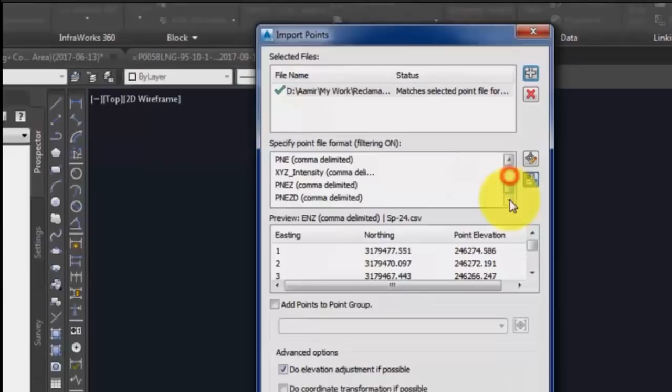First I'll go to the Insert tab and click on Point, then choose the location of the point. This is a CSV file, and I will put the pattern the same. After that I'll press OK and receive the points here.

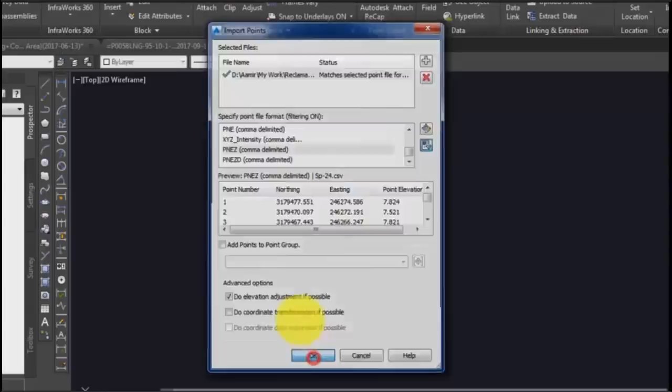As you can see here, I have all the points I imported from the CSV comma delimited file. I'll click on any one point, right click, and go to the point group properties.

Now you can find so many options like description only, elevation description, elevation only, point name, and the last one, point elevation and description. We can add more point labels, even point styles.

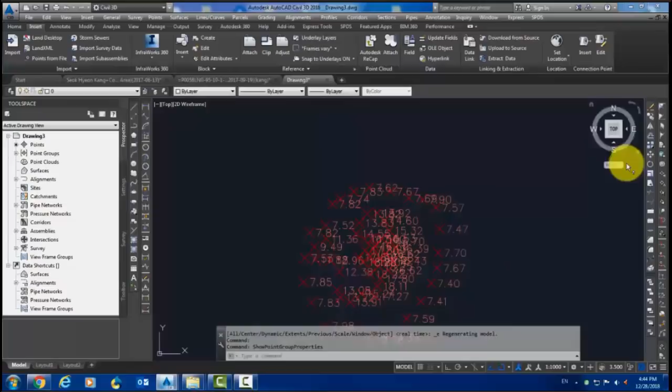He said when he opened the drawing he cannot find these options. The reason behind it is, in this AutoCAD drawing, I'll import these same points, and you can see here also I cannot find these properties.

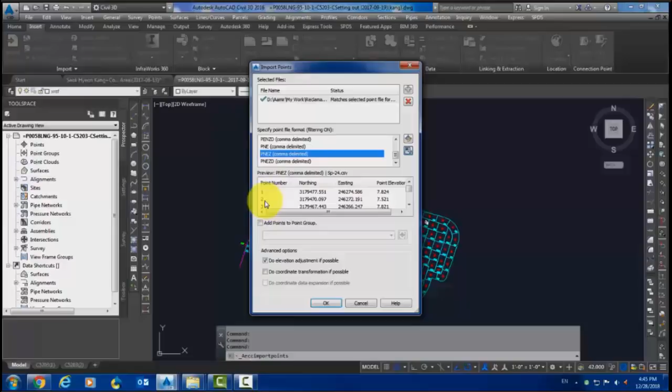I'll proceed with the same procedure. I use the same CSV comma delimited file, open it, use the same PNEZ comma delimited, press OK, and here I have these points. Now you can see these points show up.

I'll click on any one point, right click, and go to the point group property. Now you can see I find only None and Standard. Point style, label style, both are None or Standard.

That is the question he asked me, what is the solution for that. Let's see, we will do this. You can see in the email he said only standard shows to me.

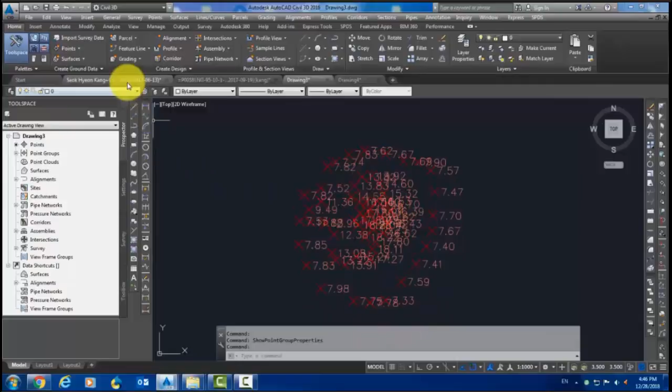So here I have one drawing. In this drawing I set out my own settings for the labels and point styles. I will import the points first, and now you can see I have a different style, which doesn't match drawing number 3.

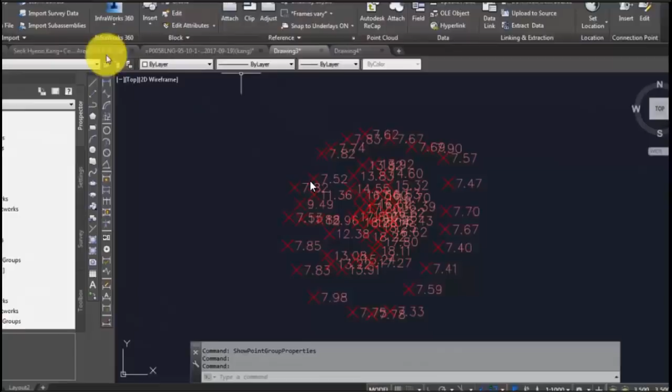It's different, only showing the elevation and the point labels, point style. This is the point style and point labels, which I made myself with my own style.

Here you can see I gave the names basic copy and elevation only copy. I copied them, then edited and saved these patterns. This is the way we can make our own point labels and point styles, which I already explained in my previous video.

So I will continue this video. Let's see.

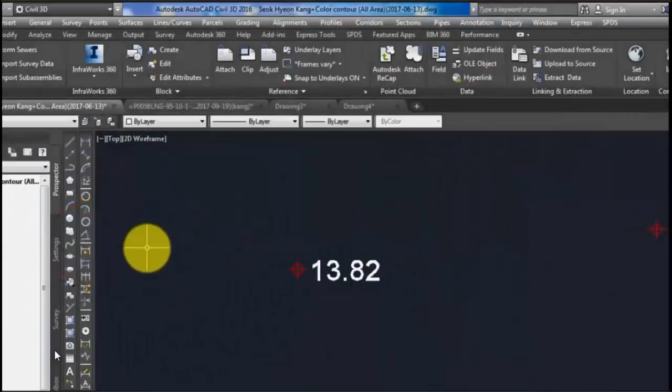I'll close the extra file. Now here I will import the same point style and label style that I made myself. So this one I will import now.

If you need to understand how we can make these styles, please watch my previous videos.

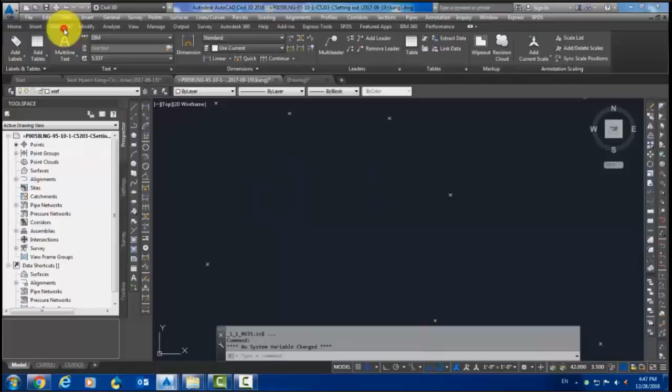So let's see how I can import these points. Go to the view, and then find the tile vertically option. I'll click on that, and now you can see 4 open drawings. One is the home page, this is the drawing number you can see in the middle, this is drawing number 1, and this one is drawing number 3 in AutoCAD. As you can see, all the drawing names are on the bar.

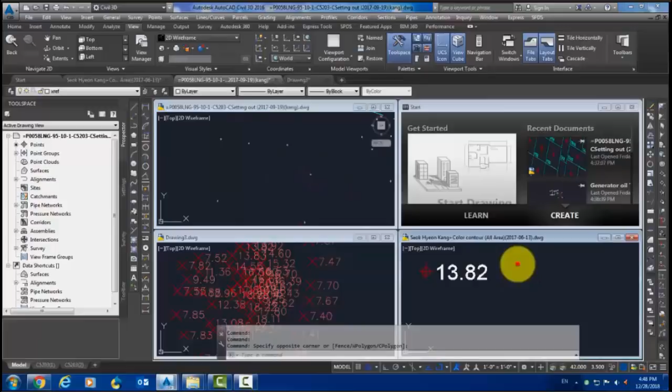So what I will do, simply let's see. For example, I click on any one point, or if I need a copy of these points, I have to work with the same drawing. So I click on this drawing and then go to settings, and then there is a point group.

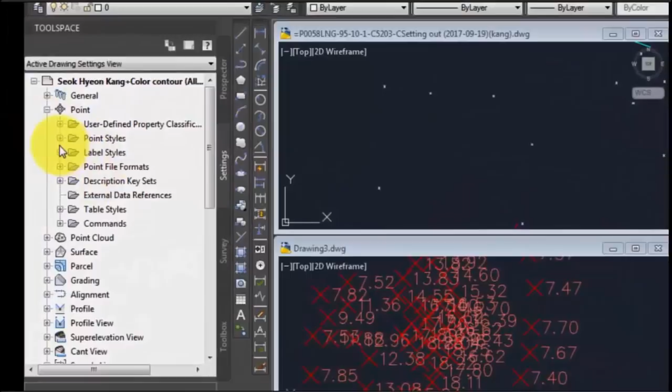Settings, then points, and then here is a point style. I'll click on the plus, and what I want to do is use my own created point style, a copy of basic. I click on that and drag it into the drawing where I need it. When I reach there, I simply release my left mouse button, and this automatically imports into this drawing.

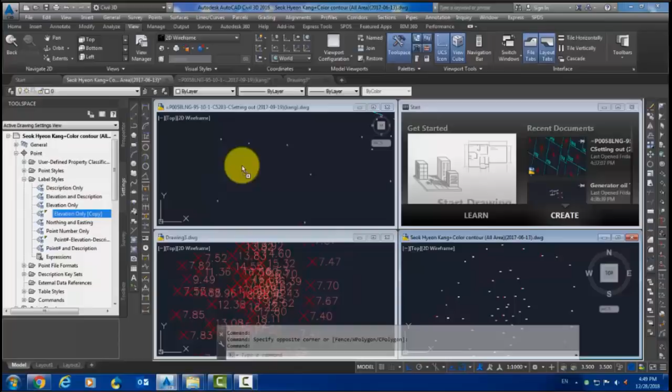After that, I click on my previous drawing where I made the label style. So I will go again to settings, then point labels, and here I have an elevation copy. Same as before, I click on that one, elevation only copy, and drag it into the drawing where I need it. When I reach there, I simply place it there, and then I will maximize.

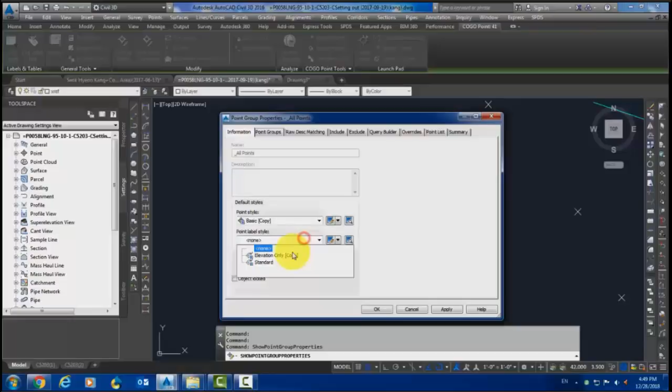Now I will click on any one point, right click, and go to point group properties, and now you can find in the point style a 'basic copy'. Before, we only found standard and none. Now you can see in the point style we have basic copy, and for label we also have elevation copy. I will apply and close.

Now you can see the points. Now this point you can see is very small. The reason is the setting of this label and point style is very small.

So what I will do, I simply click on that point and right click, go again to point group properties, and then point label style. I click on the triangle and edit.

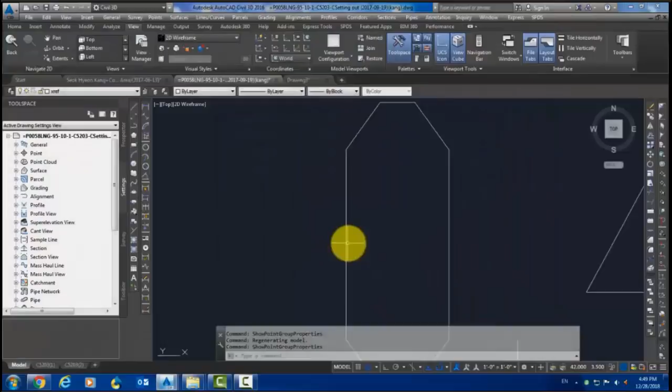Now here you can see the layout panel. I have text, and then the text height. I will change my text height. I will put 0.25, apply. Only in the text, apply and OK, and then OK again. Now you can see my text height, this label height is very big, but the point style is still very small.

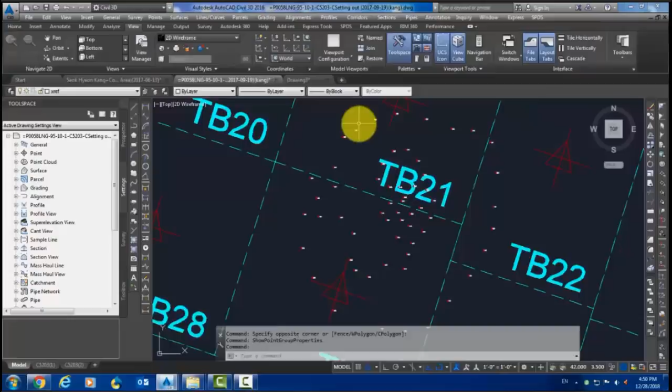So I will repeat again. What I will do is click on the same triangle, and then change the height of this point. I will put the same 0.25. OK, apply and OK. Now you can find the point label and point style both are changed with the height of 0.25.

This is the way how we can import the point label and point style in Civil 3D from one drawing to another drawing. If you want to make your own point style, please watch my previous video, especially in English. In the first videos you can easily find every step by step. I explain how we make the labels, how we can make the point styles, and also what point descriptions are and how we can apply them in point labels and point styles.